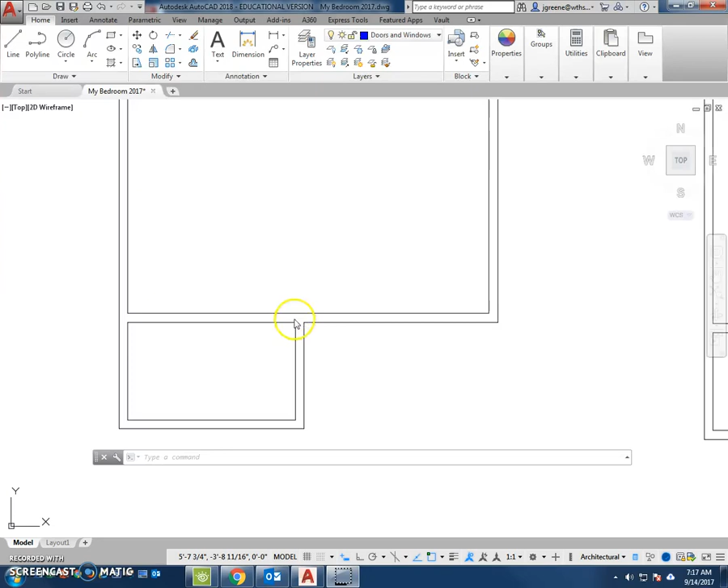Here at the bottom left of my walls, I have a space for the closet. As you can see, I drew the wall all the way through, but we don't draw it with the opening just yet. With most bifold closet doors, a very common practice is that the door is centered inside the wall. So if we consider this the wall for our closet, we'd want to center it somewhere. You want to double check that in your room and make sure it's centered, because some closets aren't centered themselves, so your door might not be centered either. Go ahead and double check that.

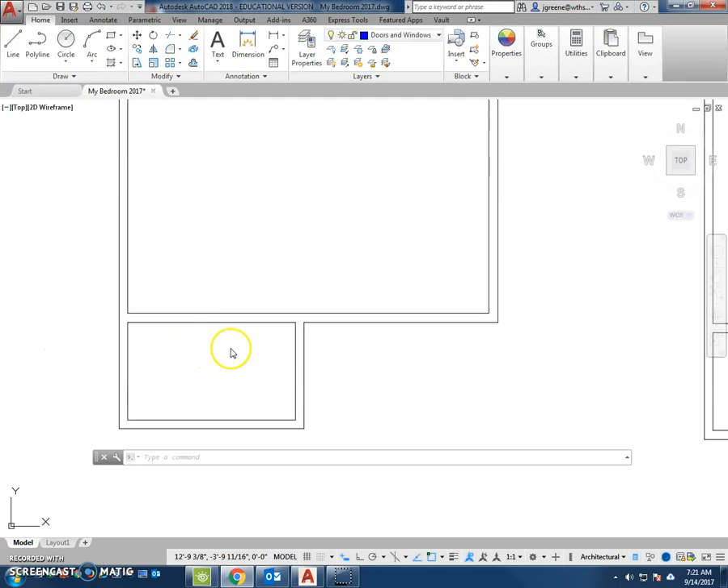In this example, we are going to have a 5-foot bifold door. To do this, I am going to put it in the center. Another way would be to offset over a certain amount, but instead I'm going to go from the center.

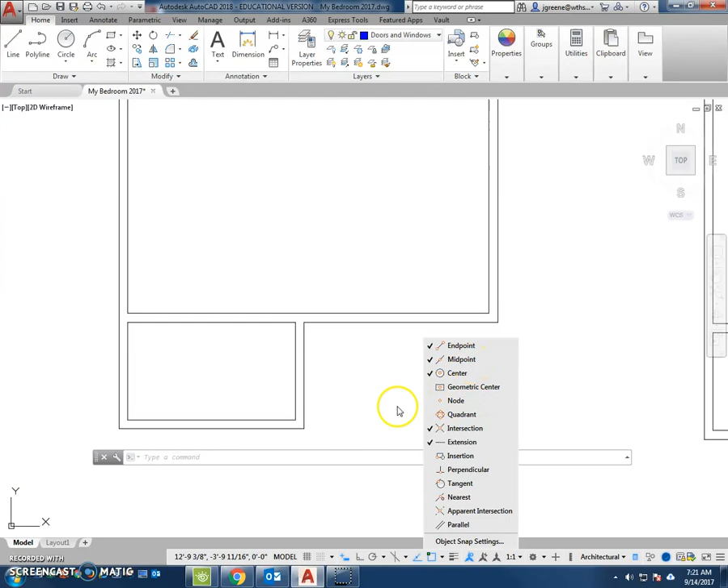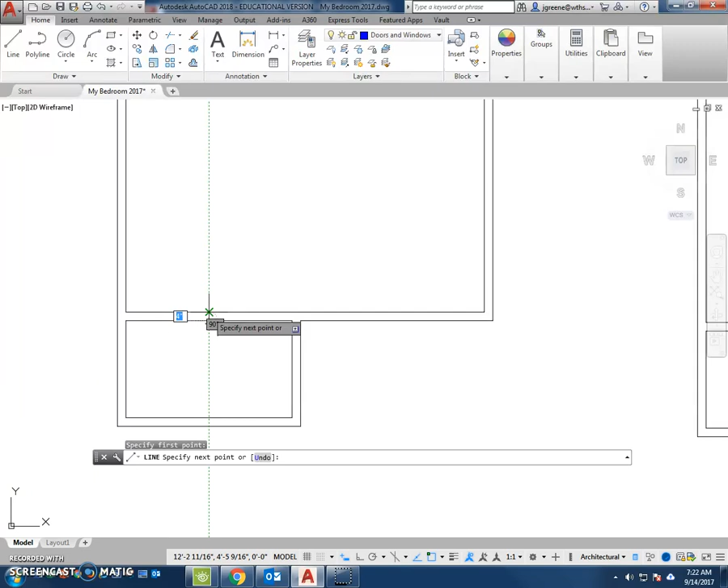To do that, I'm going to go to my object snap down here, right click on it, and make sure midpoint's on. I'm going to go up to line, and put my cursor right in the middle of this line from left to right. That's going to be the center of my closet, and you see it shows up as a triangle. I'll click, move my cursor up until I get either another triangle or an intersection with a little X, click again, and I'm done, so I can hit escape.

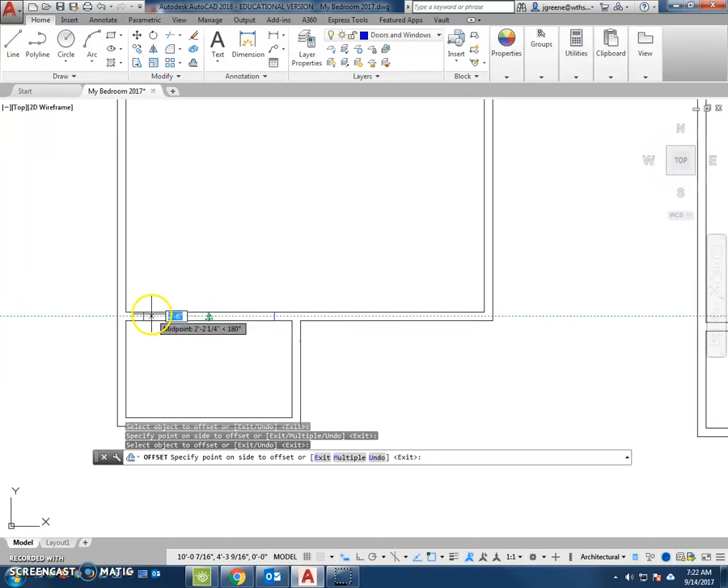Now I have the center of my closet, so I need to offset to the left and to the right half of 5 feet, which would be 2 feet 6 inches. So I'm going to offset 2 feet 6 inches to the right and to the left. Just like before, I will delete that little line in the middle.

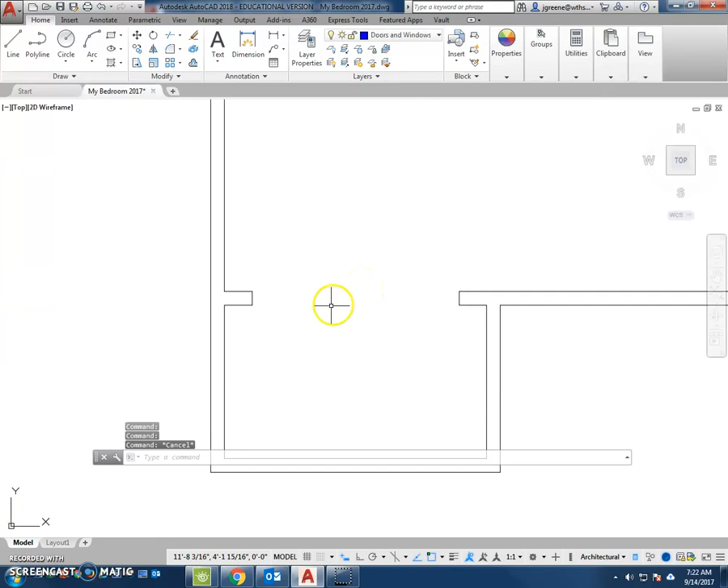I will then select trim, and trim that out. You can see here that these little ends are blue. I'm going to select these lines, and technically they're part of the walls layer, so I'm going to put that back on my walls layer and hit escape. Now I have the opening for my bifold door.

For my bifold door, I need to do a little bit of math, but it's not too difficult. With a bifold door, we're going to have 2 lines on each side that go 45 degrees, and we want to make sure that these lines would fit the opening when the bifold would actually close. So we're going to have 4 lines in 5 feet. We're just going to do some math.

All you're going to do is take your opening—for mine it's 5 feet, maybe 6 feet for you, 7 feet, 4 feet, whatever it may be—and divide that by the number of lines you need to draw. Since this is a bifold, that's 4 lines. So I'm going to take 5 feet divided by 4. Or we already know that half of this, since we just offset it, was 2 feet 6 inches. If we divide that by 2 again, we get 1 foot 3 inches.

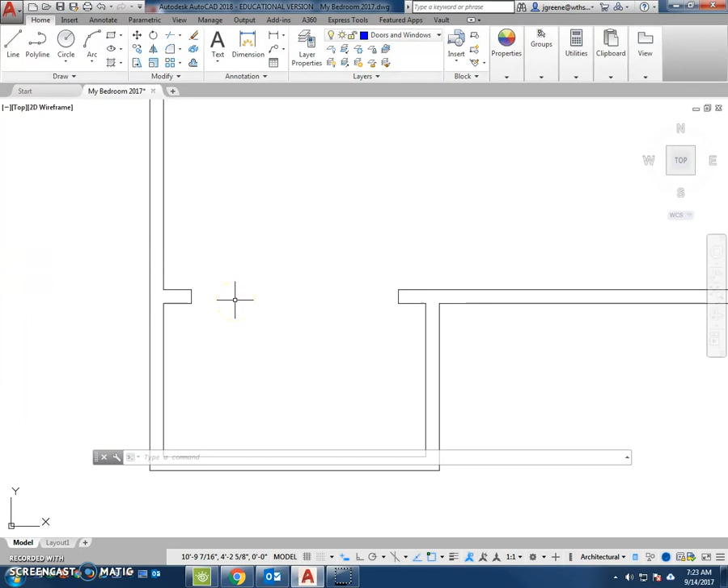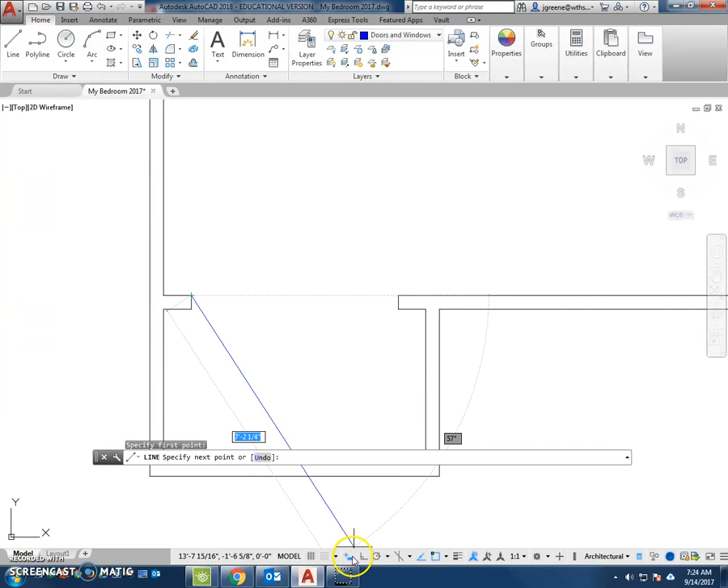I'm going to make sure I'm on my doors and windows layer, select line, and I know these need to be at 1 foot 3 inches. The hinge is going to be to the outside of the closet. I'm going to click, move down to the right, and since I have dynamic input turned on down here, I'll go 1 foot 3 inches. Then I'll hit tab over to my angle, and I want all these to go at 45 degrees, or a derivative of 45 degrees.

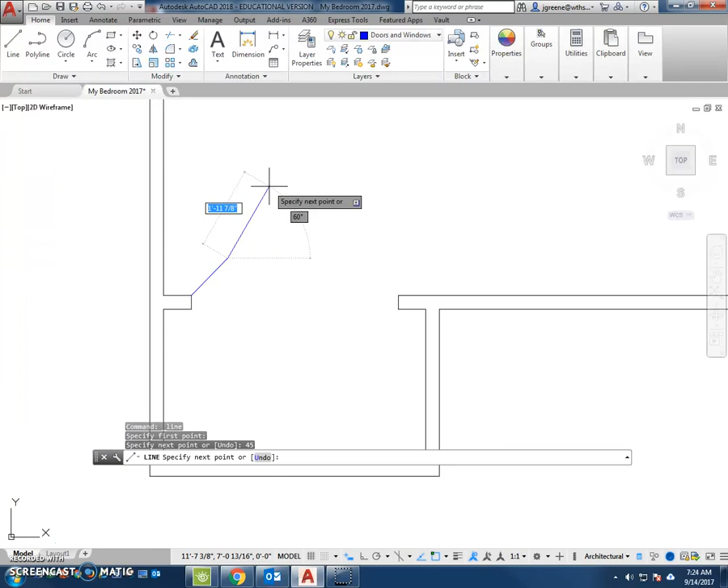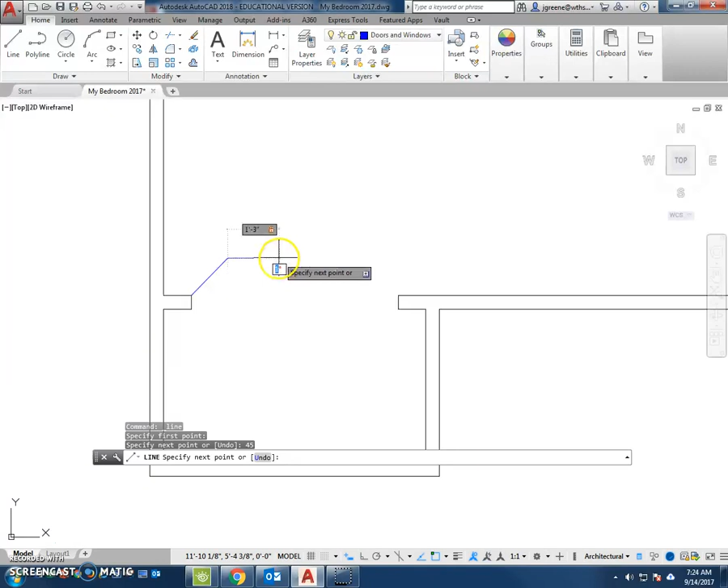So the first one is going up and to the right, so that's going to be 45 degrees. Then I'm going to go back down, again 1 foot 3 inches, tab over, and I want this one, if I use polar, to be at a different angle, which would be 315. But with dynamic input on, it's using a reference line going to the right, and it's still showing like 45 degrees again. I don't know if 315 would work because it throws it up there, so it looks like it does want us to say 45 degrees. Hit escape, and that is one side of the closet.

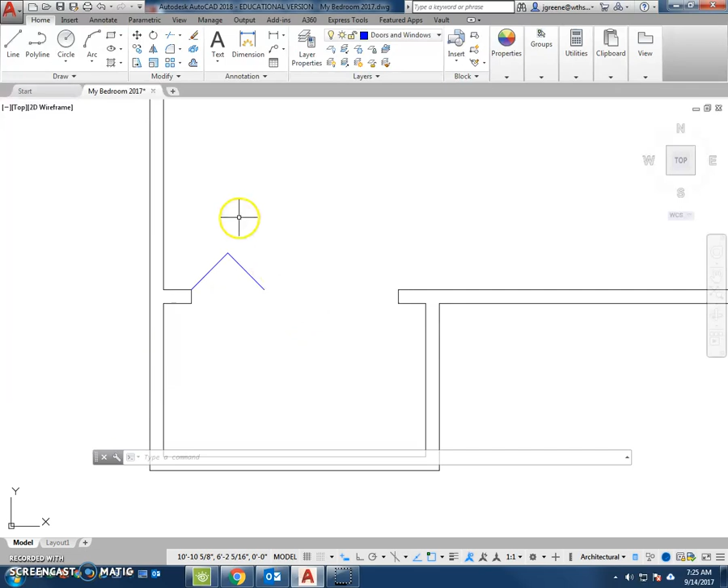Perfect, here's your next little tool to learn. I could go ahead and do it on the other side easily, but instead I'm going to use a new tool called copy. I'm going to go up here and select copy. Inside copy, the first thing our command line asks is to select our objects, so I'm going to select my 2 lines and I'm done selecting. I don't want to copy anything else, so I'm just going to hit enter. And now it says select a base point.

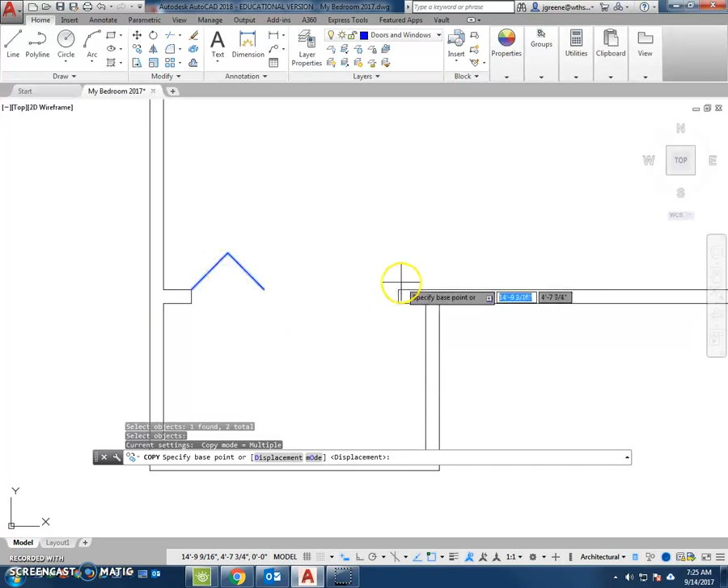I'm pretty much just going to copy this over to here, since it's kind of a mirrored image of itself. So I'm going to select this point as my base point, and just move a copy of it right to this corner and click. I could make more copies if I want, but I don't, so I'm just going to right click and enter. And there we go—we have a bifold door.

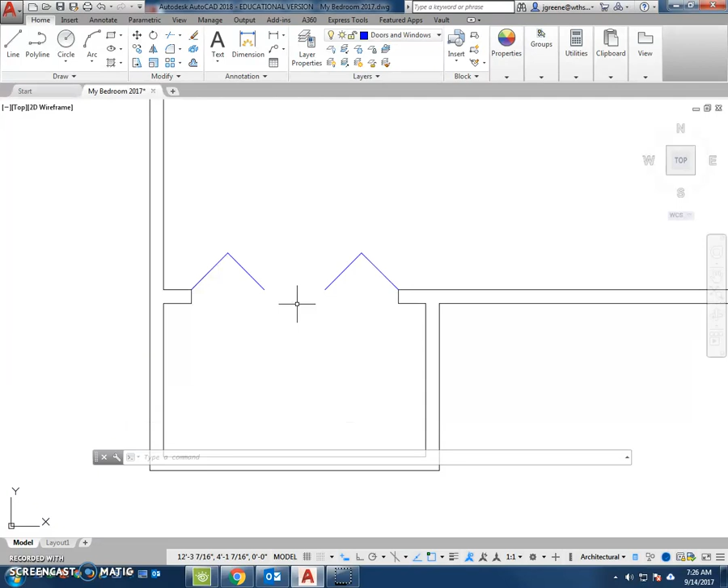Use the same kind of idea: figure out your opening, divide that by 4, and that's going to be each of your lines. They're going to go at 45 degrees, and now you have a bifold door.